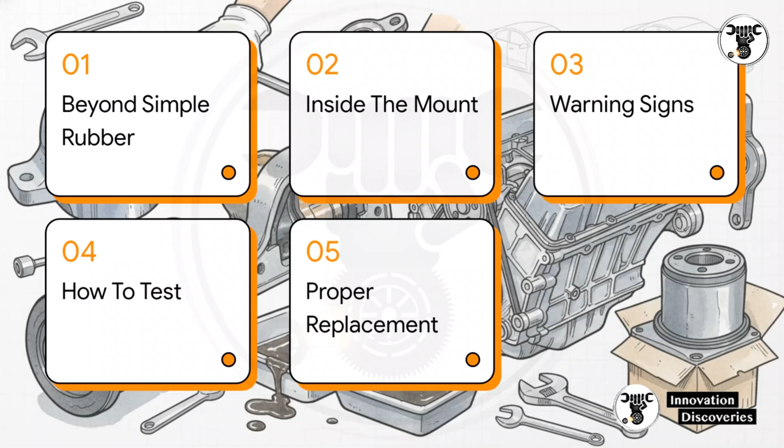So, here's our roadmap for this explainer. 1. Beyond a simple rubber block. 2. Inside the hydraulic engine mount. 3. Warning signs of mount failure. 4. How to test your mounts. And finally, number 5, rules of proper replacement. We're going to quickly demystify the complex engineering and then get into some really practical, money-saving advice.

All right, kicking things off with Section 1, Beyond a Simple Rubber Block. Okay, it's time to shatter a massive automotive myth right out of the gate. Your engine is not just sitting on some dumb hunk of rubber. Modern vehicles use engine mount fluid damping. This means there's actually hydraulic fluid inside the mount actively absorbing and converting vibrational mechanical energy into heat. That is the real magic here.

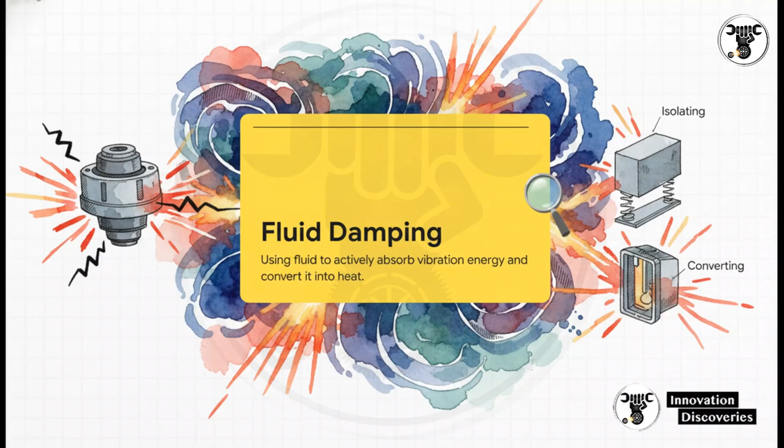Notice the difference between just isolating and actually converting. A plain rubber block might isolate a vibration, but a fluid-damped hydraulic mount literally destroys that vibration by turning it into heat through fluid resistance.

Moving right along to Section 2, inside the hydraulic engine mount. Let's peel back the metal and rubber and see what's actually going on in there. It's wild how this tiny space holds such a sophisticated dual-stage system. You start with the outer structural rubber body, which, keep in mind, is supporting massive powertrain weights, sometimes over 400 kilograms. Inside that, you've got an upper pump chamber and a lower compliance chamber.

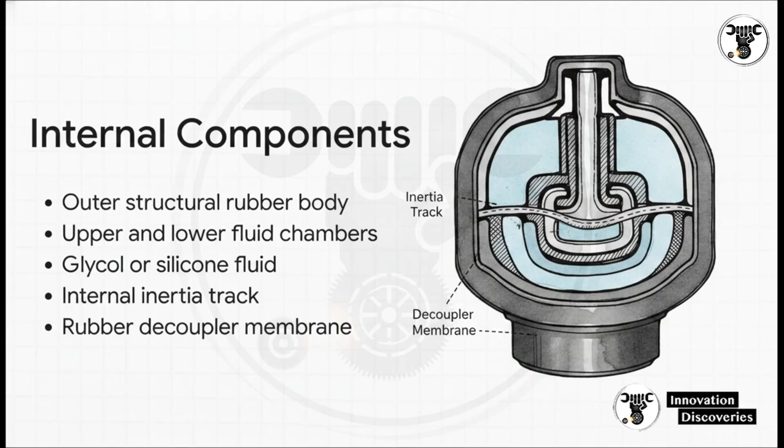Filling those is a highly specialized glycol or silicone-based hydraulic fluid. Connecting them is an internal inertia track right alongside a free-floating rubber decoupler membrane. And those last two, absolute superstars. Here's exactly why they are the superstars. You see, an engine throws out wildly different vibrations depending on what you're doing.

Sitting at a stoplight, that rough, low-frequency 5 to 15 hertz shake is wrestled by the inertia track. It forces fluid through a tuned, restricted passage, and that viscous resistance just kills the large amplitude shake. But on the highway, once you hit 50+ hertz, the fluid actually locks up from inertia. If the fluid had to do all the work, your mount would feel like a solid rock.

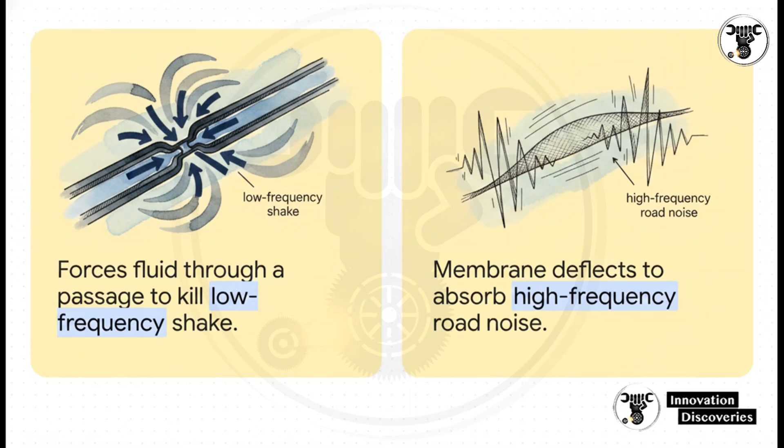Enter the free-floating rubber decoupler membrane. It deflects just micro amounts to filter out that rapid highway road noise without forcing fluid through the track. It is a brilliant dual-mode setup.

So, what does this all mean for stiffness? Well, because of this dual-stage design, the dynamic stiffness of the mount can intentionally spike to be 3 to 5 times higher than its normal static stiffness. Basically, when the engine tries to shake violently at idle, the mount dynamically stiffens up via that fluid resistance to actively cancel it out, and then totally relaxes to stay soft for high-speed cruising.

I absolutely love this perspective from an automotive engineer. Quote, "Better isolation requires a soft mount. Better damping requires controlled stiffness. The inertia track and decoupler system allows both objectives to be met simultaneously." End quote. It perfectly sums up why these hydraulic systems totally outclass standard rubber mounts. Engineers are essentially fighting two completely opposite physical needs, and this elegant internal fluid and membrane design solves the puzzle beautifully.

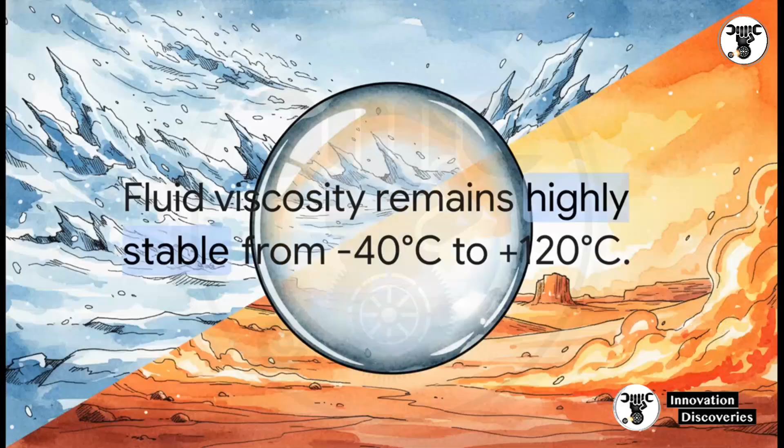But you know, none of this matters if the fluid freezes solid in December or boils in July, right? Luckily, the specialist hydraulic fluid inside maintains a highly stable viscosity from -40 degrees Celsius all the way up to a scorching 120 degrees Celsius. This ensures you get consistent vibration control no matter the extreme temperatures outside. Whether you're in a winter blizzard or desert heat, the fluid keeps its damping power and the ride stays perfectly smooth.

All right, that brings us to Section 3, Warning Signs of Mount Failure. So we know how smart these things are, but what actually kills them over time? Heat is a massive one.

Nearby exhaust components slowly bake the rubber. Oil contamination from engine leaks is another huge enemy because oil degrades rubber super fast. Throw in some aggressive driving, towing, or poor engine alignment, and you are really accelerating the wear. Typically, you can expect an 80,000 to 150,000 kilometer lifespan, but if you do a lot of extreme driving, you definitely want a tighter, practical service schedule because heat and fluid leaks will slash that timeline significantly.

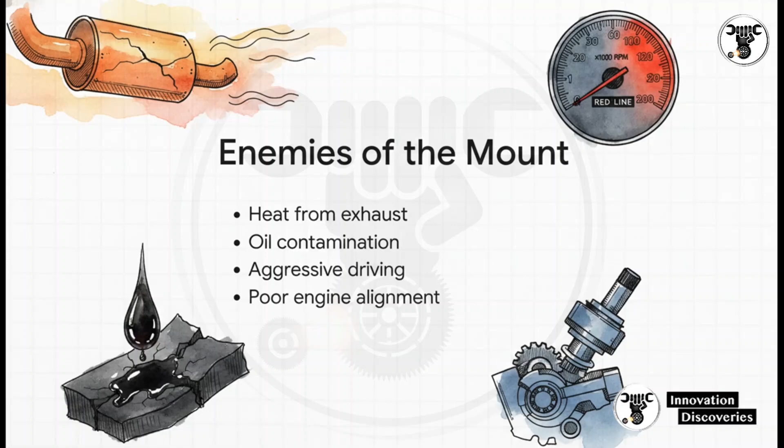Now, you might want to mentally check off what your own car is doing as we go through these early warning symptoms. Are you feeling excessive vibration or a buzzing in the cabin at idle? Do you hear a metallic clunking sound when you're shifting gears? What about visible oily, clear, or yellowish fluid residue under the hood? Or maybe just increased noise and harshness at highway speeds? That last one actually points straight to a failed decoupler membrane. Basically, these are your car's cries for help.

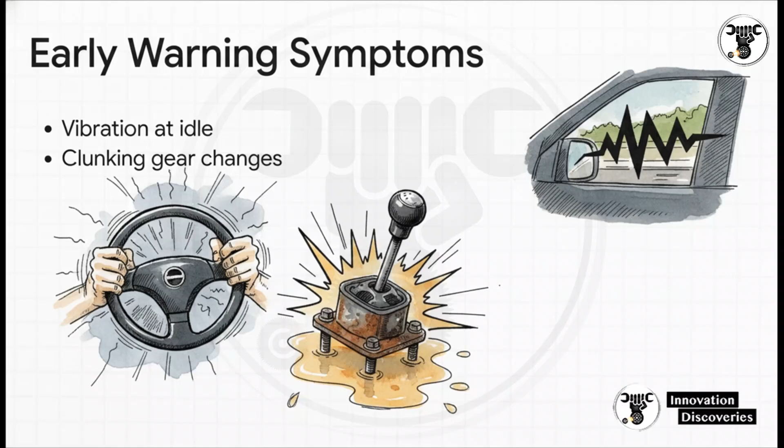And we absolutely need to talk about why you can't just ignore this. If a fluid mount fails, it basically becomes a collapsed, useless block of rubber. All that raw, violent engine vibration goes continuously straight into the chassis, and this creates a devastating domino effect. It fatigues and destroys really expensive secondary drivetrain parts. We're talking snapped exhaust flex pipes and torn up CV axles. Getting those mounts swapped promptly is literally saving your wallet from massive secondary repair bills.

Let's move on to Section 4, how to test your mounts. Okay, let's empower you to check this yourself. You don't need any special tools for this. First up is the engine rock test. Now, please follow these safety precautions carefully. Park safely, set the brake, and put the car in neutral.

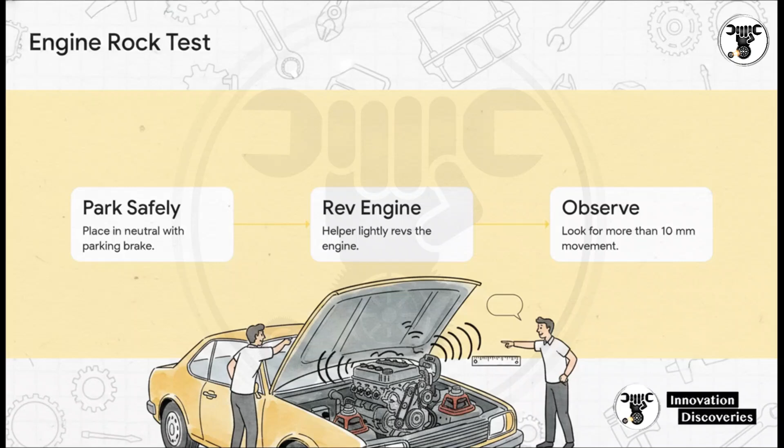Stay completely clear of the engine bay and have a helper lightly rev the engine while you watch from a safe distance. You are looking for more than 5 to 10 millimeters, so about a centimeter, of engine movement. If that engine looks like it's trying to jump out of the hood when the gas is pressed, your mounts are heavily degraded. You can also run a quick checklist of 3 simple spot checks without removing any heavy components.

First, a visual inspection. Grab a flashlight and hunt for any yellowish or oily fluid seepage around the mount body. If it's leaking fluid, it's a definitive failure. Second, physical touch. With the engine completely cool and off, press on the mount. If it feels collapsed or unusually soft, it's done for. Third, an audio check. Listen for constant metallic rattling or gurgling when you accelerate. Pro tip here, I highly recommend doing a quick visual check for leaks during every single routine oil change so you catch this stuff early.

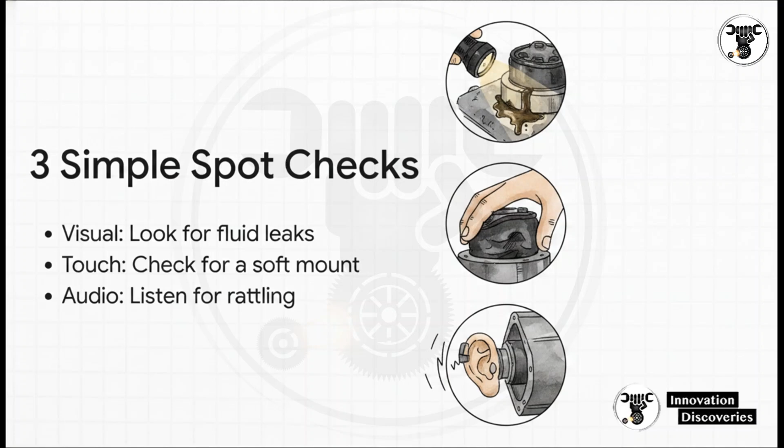Finally, let's wrap up with Section 5, rules of proper replacement. All right, so you found a bad mount. Now you need to fix it, and you really need to avoid bad mechanic advice here. Matching the original OEM hydraulic specifications is absolutely critical. If a mechanic tells you to just slap in a cheap solid rubber mount to save a few bucks, don't do it.

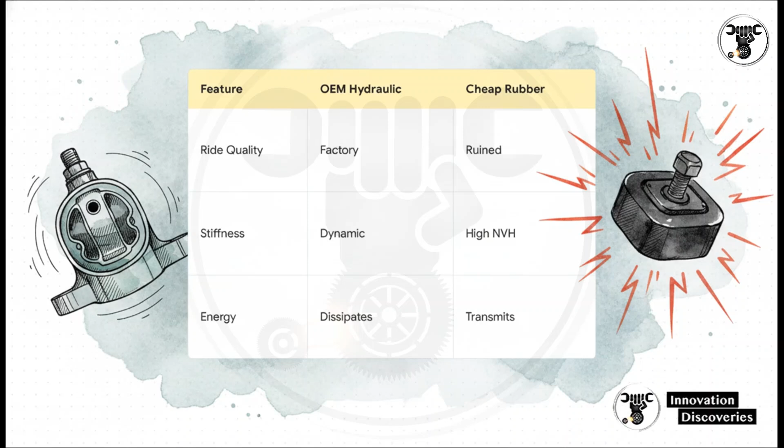While an OEM hydraulic mount maintains your factory ride quality, gives you that 3 to 5 times dynamic stiffness, and actively dissipates energy, a cheap solid rubber one literally ruins the original ride quality. It dramatically increases idle noise and harshness and transmits continuous vibration right into your seat. Substituting active hydraulic systems with plain rubber is a massive downgrade.

And here is a crucial piece of professional advice to write down. Always, always replace hydraulic engine mounts in pairs. Think about it. If one side failed from age and heat cycles, the other side has experienced the exact same mileage. If you only replace one, your engine is left unevenly supported. That ruins the overall vehicle balance and basically guarantees your brand new mount will wear out super fast because it's working overtime to cover for the old one.

Which leaves us with one final thought. Is the money you supposedly saved on a cheap, solid rubber mount really worth the cost of a shattered exhaust flex pipe or a broken CV axle a few months down the road? The engineering inside these fluid-damped mounts is working incredibly hard every single second you drive, just to protect your drivetrain and give you a luxurious ride. Treat them right, match those OEM specs, maintain them properly, and your car will definitely thank you.